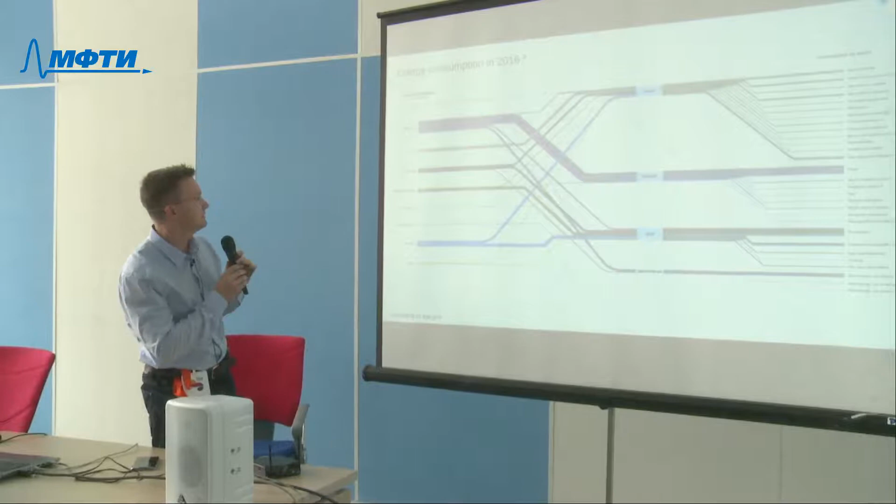Task #1, CHP. CHP is combined heat and power, a natural gas consumption minimization. We can think about this task as about ecology, not only about money. Well, energy consumption is, okay, I can't read this, but I remember. Well, industry is on the top. So industry is a large consumer of energy, total energy in the world.

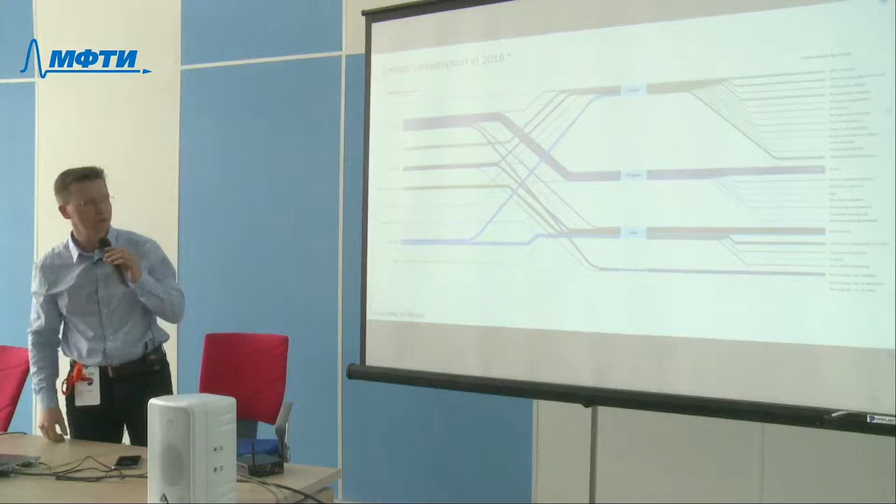And iron and steel is on the top of industry. So iron and steel consumes a huge amount of energy. So we should take this into account and try to minimize this. Well, if we take a closer look at this picture, we will see that industry consumed 29%. And in metallurgy, the biggest part is coal because of the process, blast furnace. And the second place is gas and electricity.

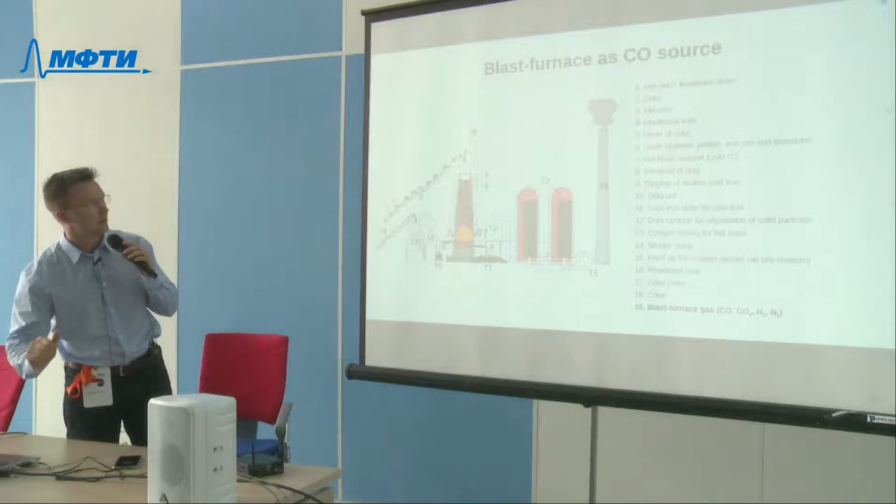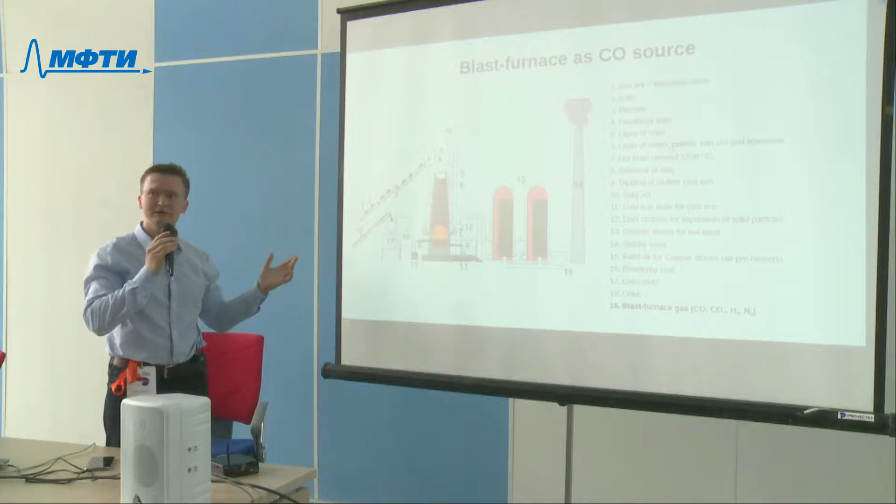So I'm not sure about every, but I think most metallurgical companies have their own CHP inside their facility, because we have a very cheap CO, carbon monoxide source, we have for free due to the metallurgical process. What is a blast furnace? A blast furnace looks like this. We have coke coming from the top and iron ore. Iron ore, руда железная. I will translate some terms because I know that you know English, but terms are very specific for this subject.

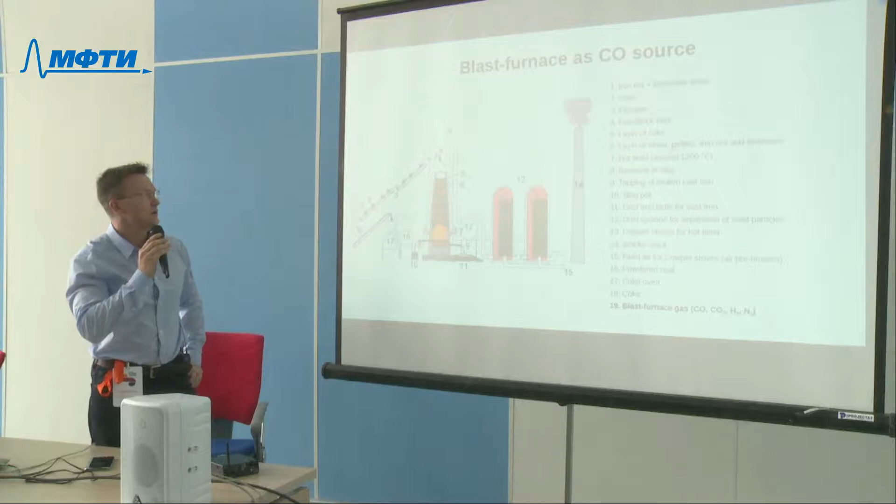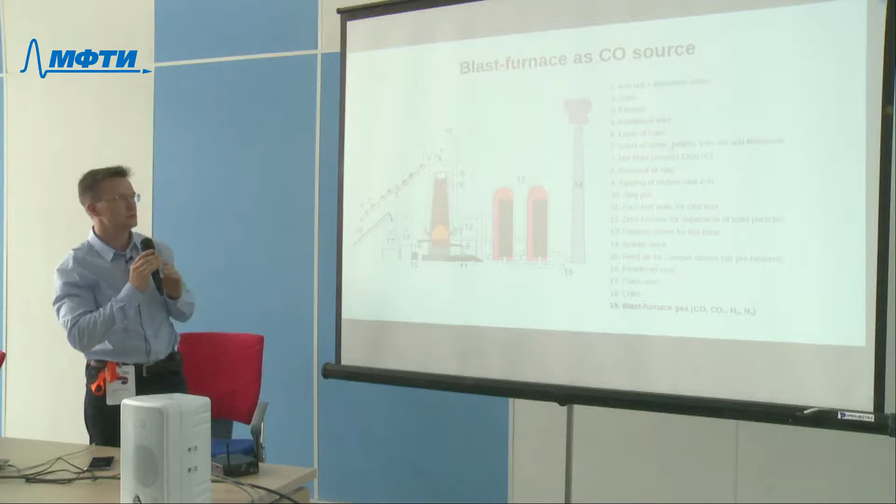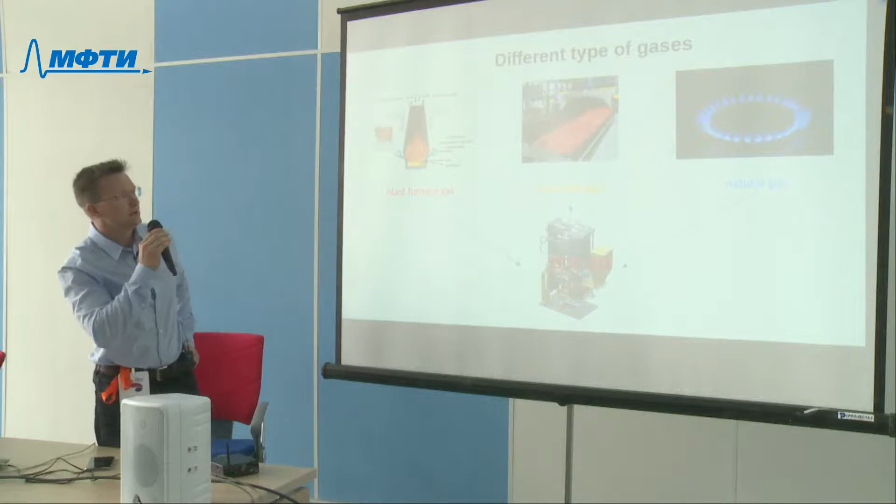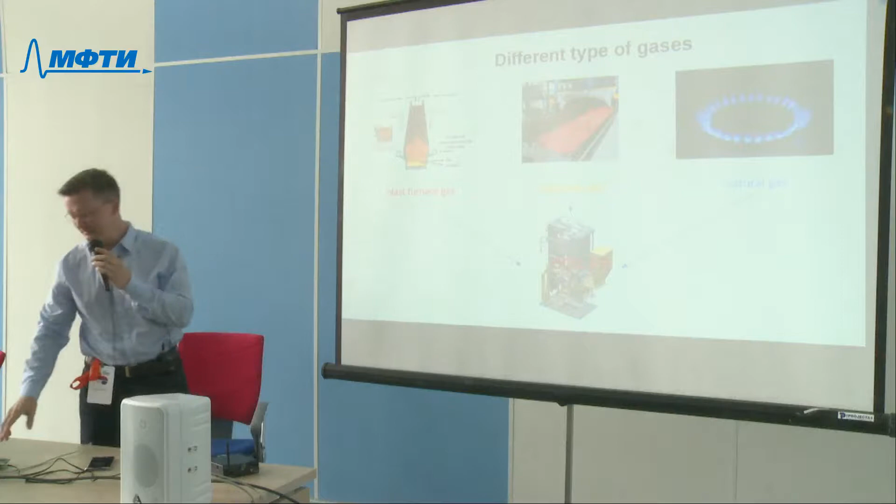Well, so this device is very huge. It's 30 meters of height, so it produces a lot of CO. CO is a source of power if we oxidize it to carbon dioxide. So it is useful to oxidize it and have free energy and generate electrical energy by itself, because to buy electric energy is not cheap. We also have another source of carbon monoxide from coke ovens. It is also a part of the technological process, and we have natural gas from natural sources. And then we put this to the boiler and produce steam and then produce electricity the common way.

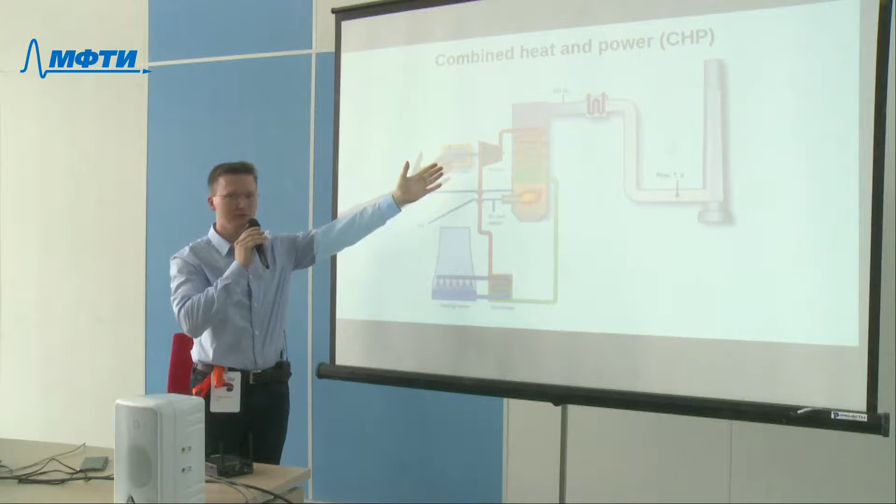Combined heat and power, just to remind, I know that everybody knows how it works. We use something that can be burned, for instance carbon monoxide. Burning, heat the water, produce steam to the turbine to the generator, and here we have electricity. Okay, it looks like this. You see the human is small, and this building is a boiler where we can burn gas. Everything in metallurgy is huge. When you are first time on the plant, it's a very interesting feeling. You see heat changing pipes and so on. Well, it's about metal, it's not about artificial intelligence yet.

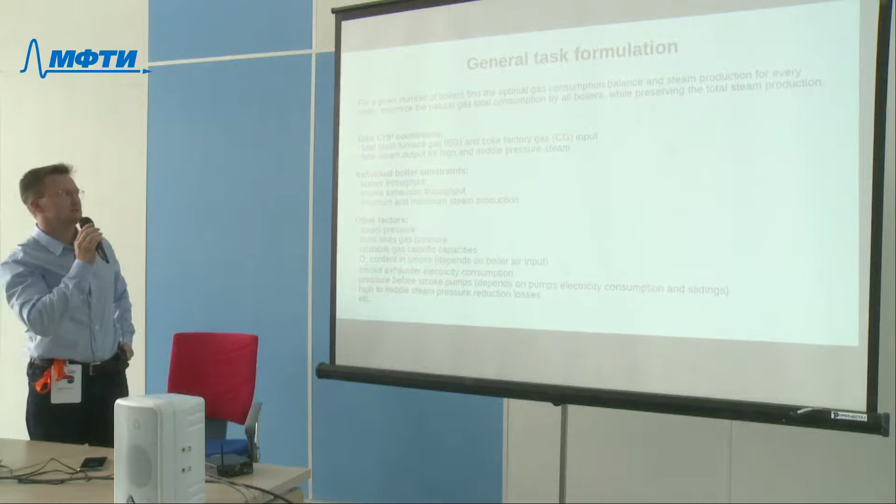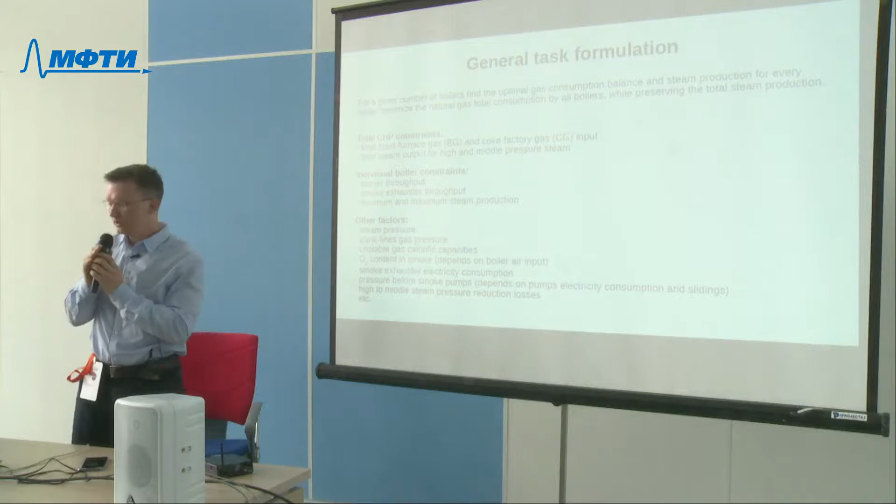Okay, how can we formulate our task? We have a number of boilers, and their properties are not the same. That's why we can change a balance and optimize it, because if they were the same boilers, we could do nothing. So we have different boilers, and we need to understand where we should produce more steam or less steam, and how to balance gas, natural gas.

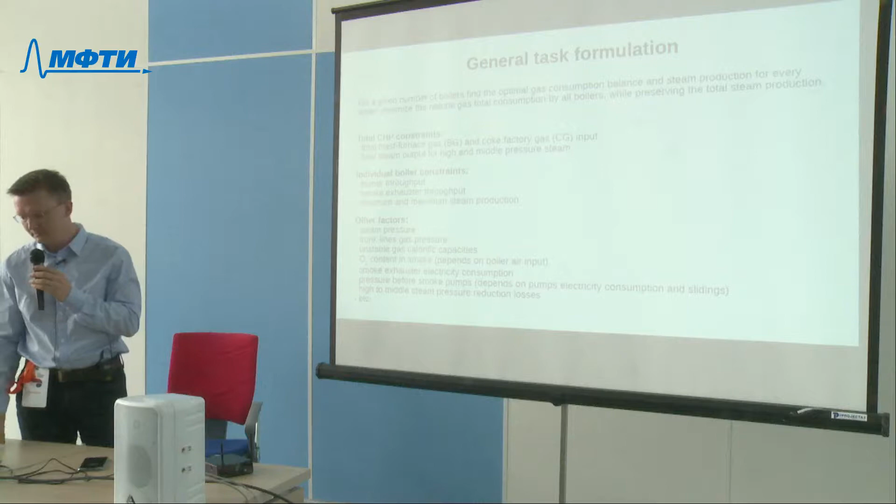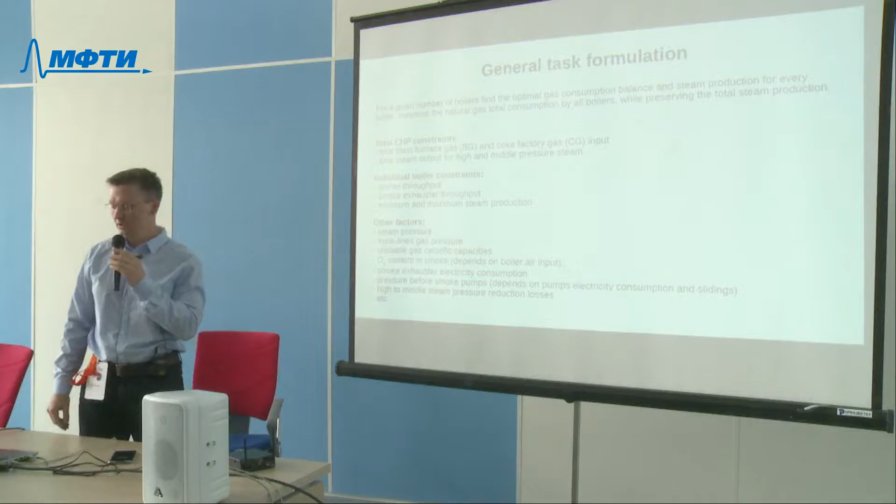We have a number of constraints like blast furnace gas or coke factory gas input. We need steam output to be constant, because the turbine doesn't like it when you change steam output. Individual constraints for every boiler, and other factors like we need steam pressure to be this or that. Unstable gas calorific capacities, because the blast furnace works in a very unstable manner, so your gas properties are unstable too, and so on. We have a lot of constraints.

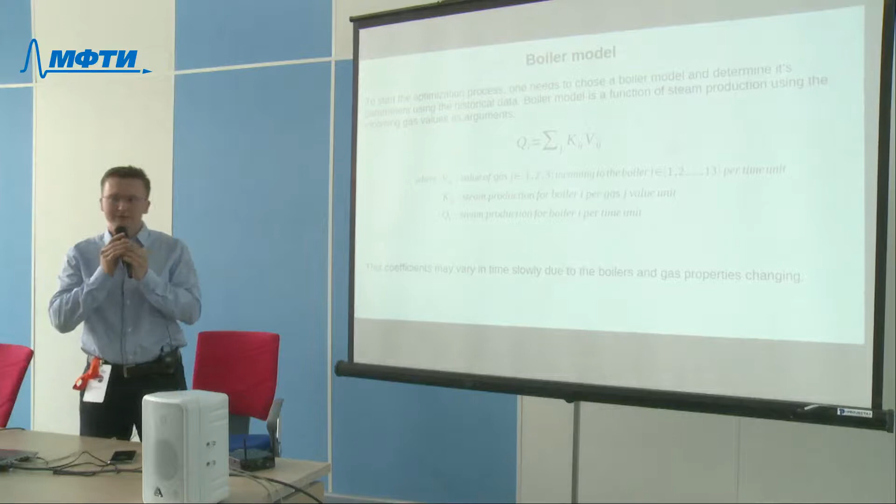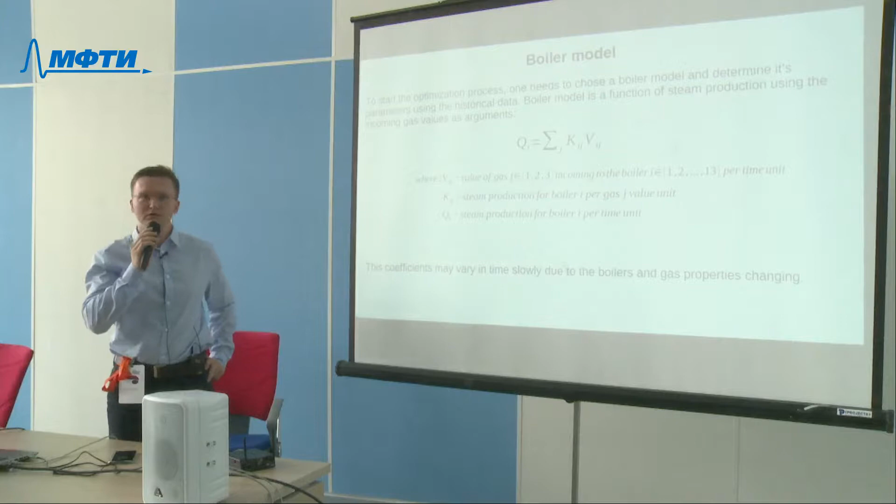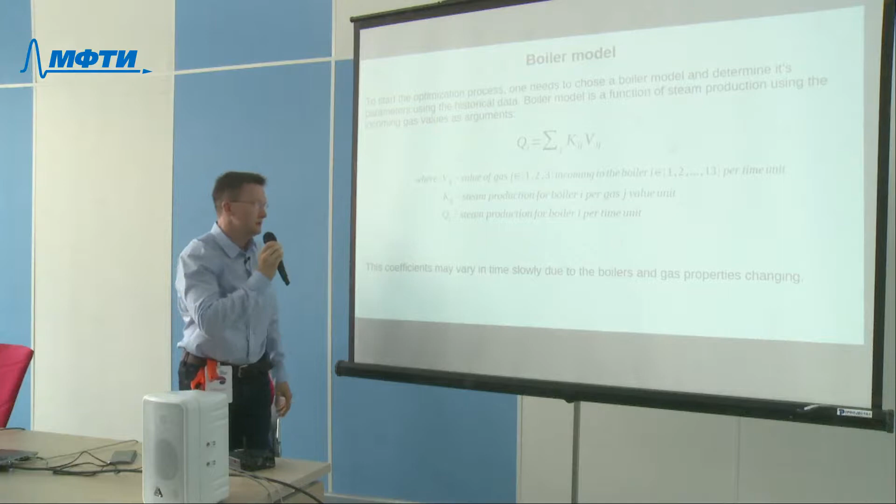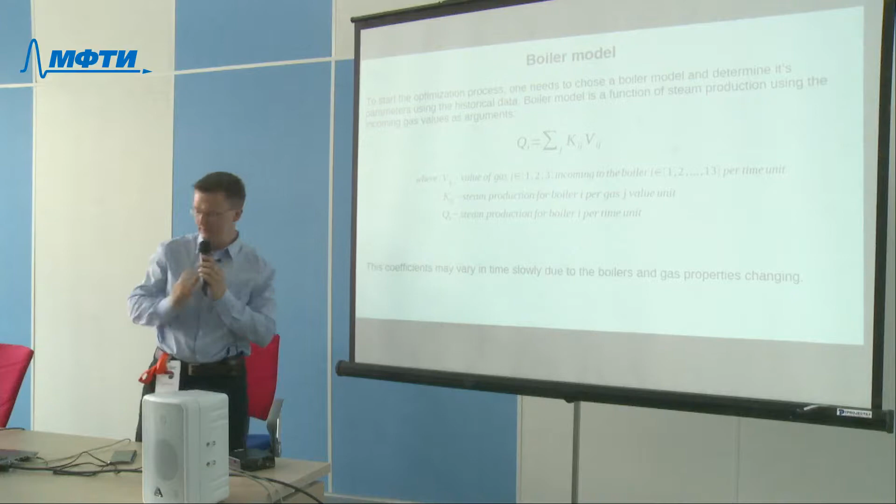Well, we should start from the simplest model. It's a linear model. If it is not enough, then we can use a piecewise linear model, and if that's not enough, we should think what to do. For this time, we have a linear model. What is this model about? This is about steam production as a function of gas consumption. So we have different boilers. We have three types of gas: CO from blast furnace, CO from coke ovens, and also natural gas. We have this. And these coefficients may vary in time, because the process is not too stable.

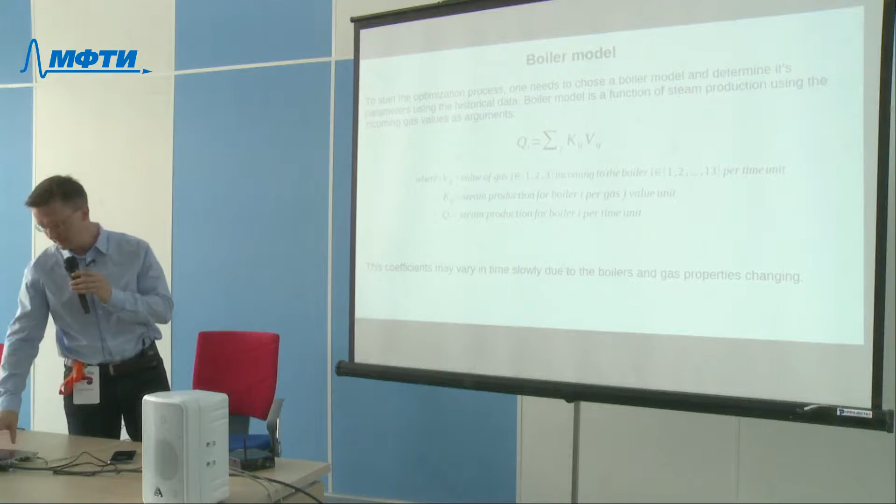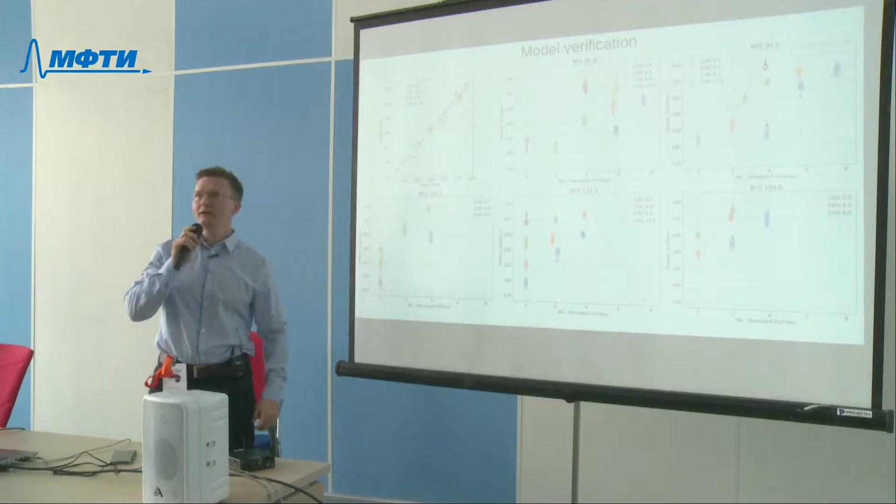Well, we have a linear model, and how will we verify that this model is good for us? Here is the machine learning part of artificial intelligence. We have some historical data, and we need to build a linear model. So it's a regression task. It's simple, but it's useful.

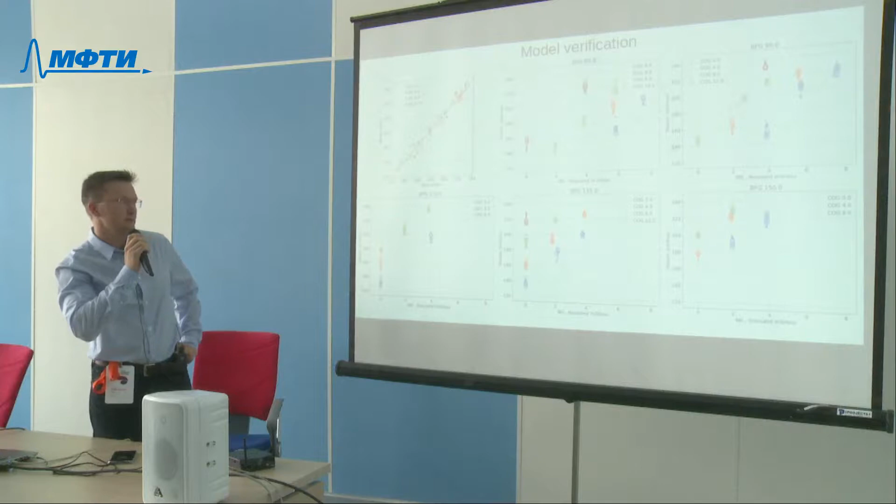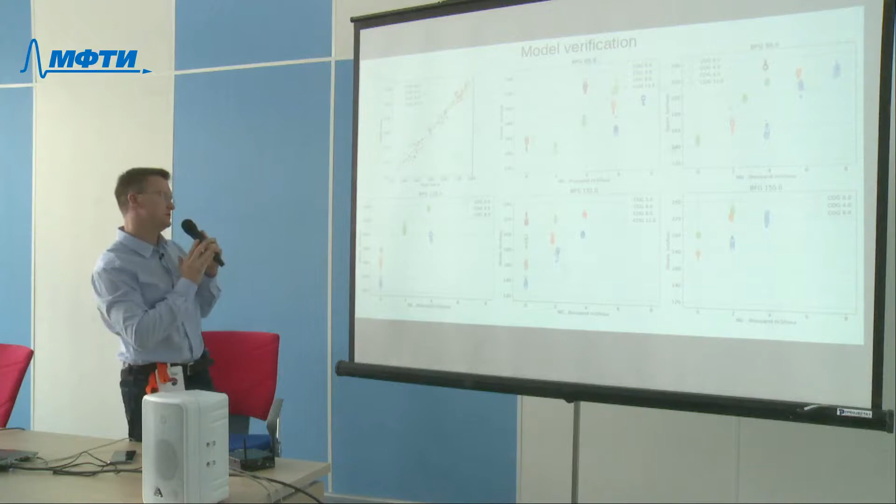How can we check that a linear model is enough? Well, crosses are the real data, and circles are the model data. And we can check from historical data that our model is good enough. It's not perfect, but it is good enough, especially if we remember that our data is very noisy, or that the process is unstable. So we decided that a linear model is enough.

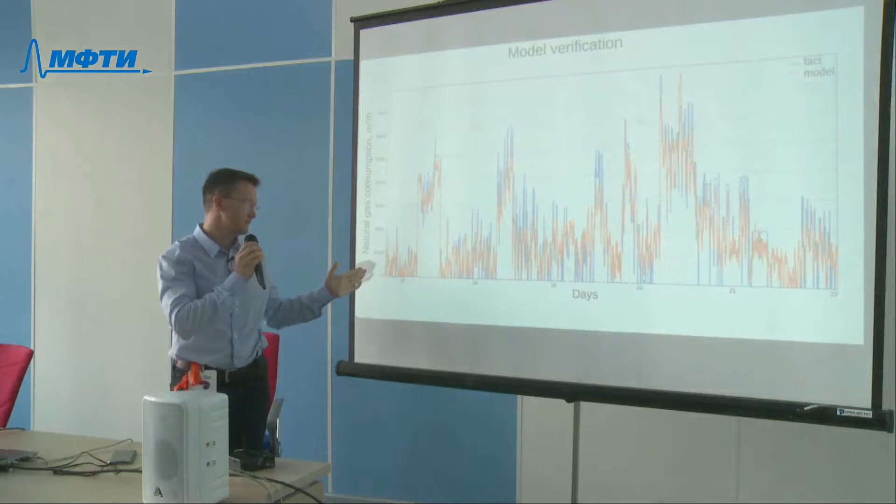Here we have a machine learning part. Also, how can we verify this model? We can compare fact and model. This is natural gas consumption from the historical point of view, and then we model this process using our model, and we see that it's good enough. It's about 5–10% of accuracy, so it's good. Well, so let's start to use this model.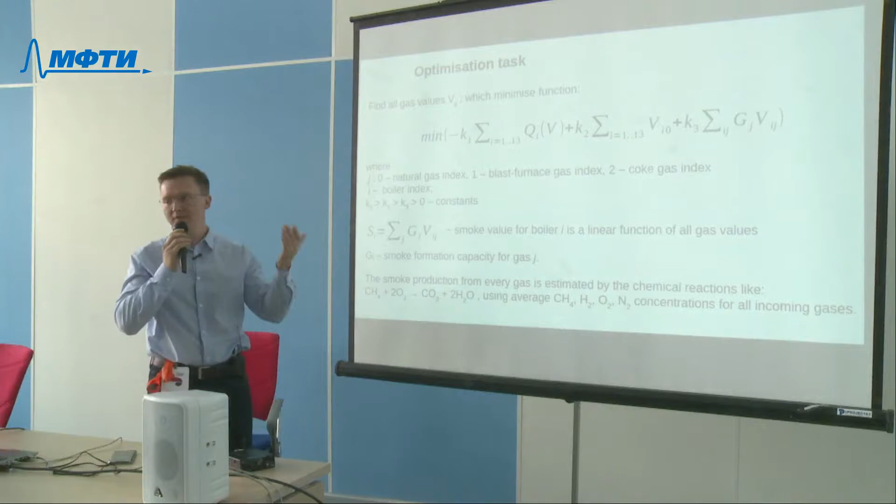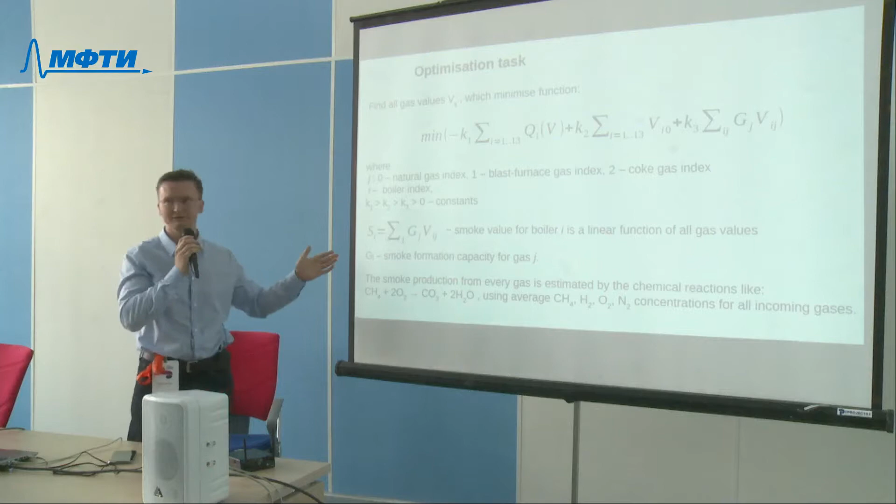And we need to use some chemistry to write chemical reactions to understand the volume of smoke, because you cannot produce too much smoke; you have constraints due to the chimney, the smoke pipe. Well, it's just a classical optimization task with a linear function and linear constraints. It is well known that it can be solved very fast if it is not huge in terms of variables and constraints. This task is not huge. We can solve this on a personal computer.

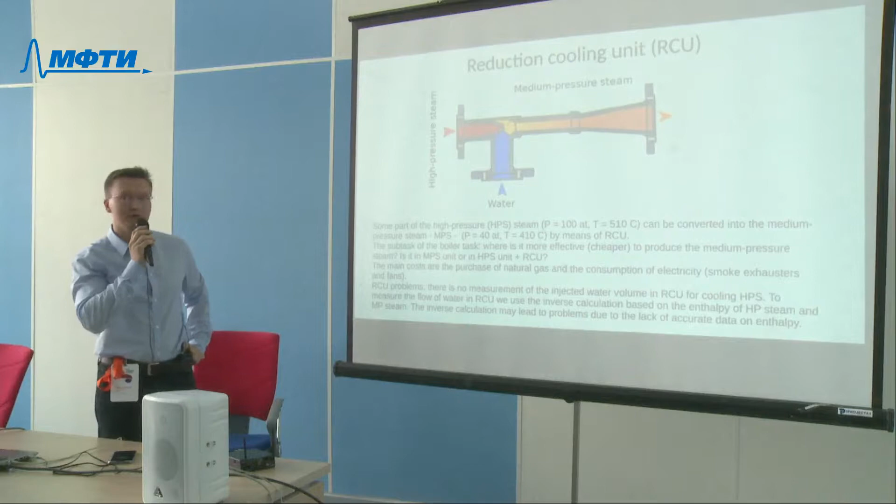If it were a contest, we should stop here. But life is hard, life is more complicated, and we have more detail. So we have some special steps in this facility. We have a reduction cooling unit, for instance. Why am I talking about this? Just to remind that sport is not life, because, I repeat, if it were a competition, we should stop here. We could give you this task, you would solve it, and everybody is glad. Well, it's just a proof of concept in real life. Then you should continue to this step.

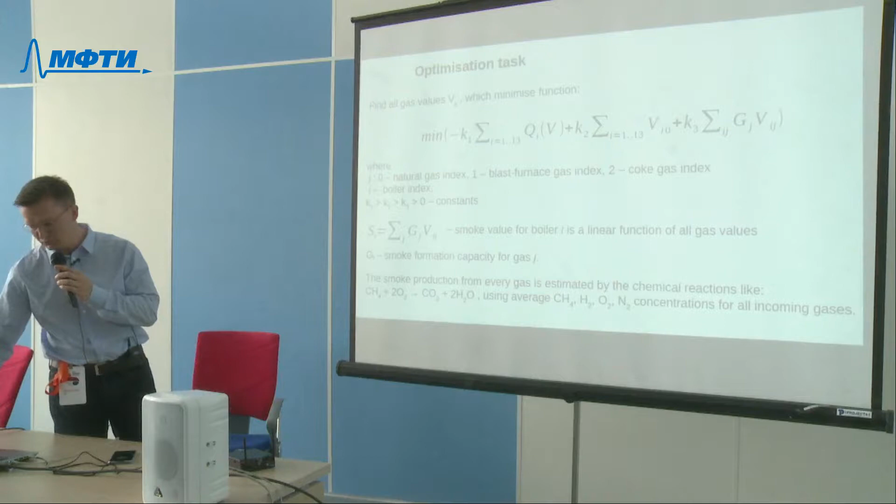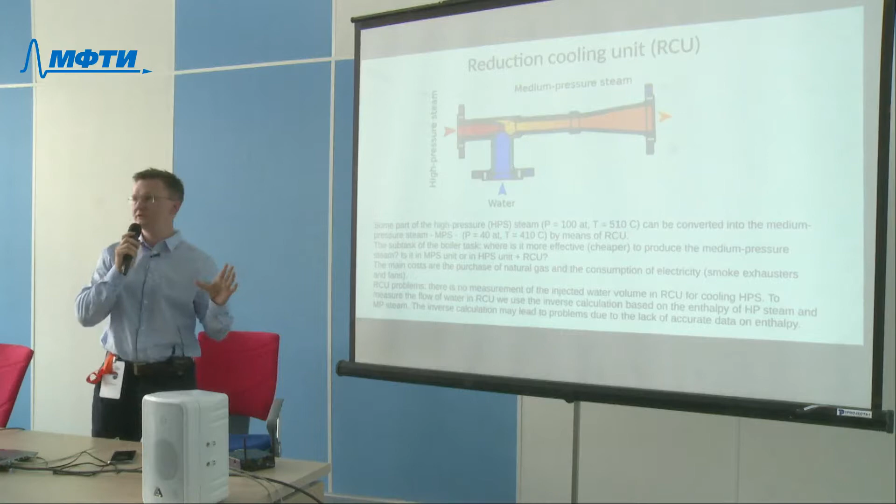Hard life. We have a reduction cooling unit which can convert high pressure steam into medium pressure steam. Then you need to choose where you want to produce your steam if you want medium pressure steam: on medium pressure steam boilers, or on high pressure steam boilers and then convert it to medium pressure steam. Well, we have a lot of difficulties inside this part. I will not read all this because it's boring.

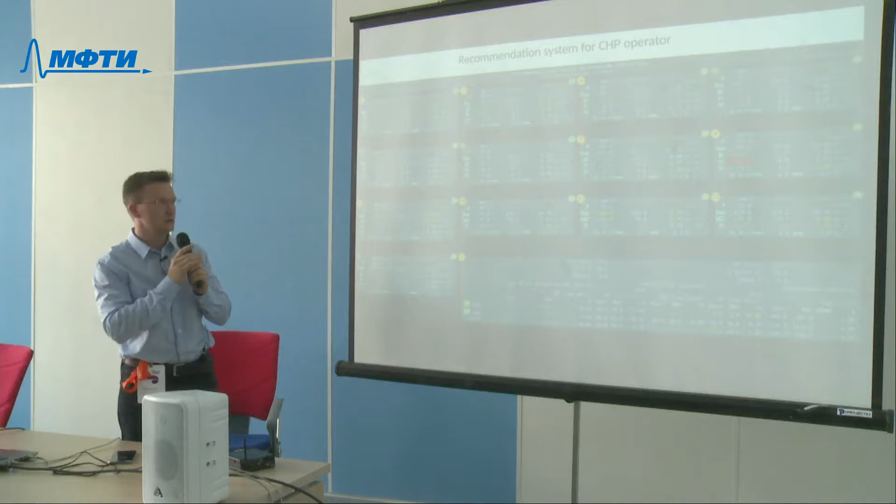Well, the system, the recommendation system, looks like this. If you're an operator of all these boilers, you have this interface which recommends what to do. You don't need to think. You don't need to learn too much. You just start this application, and it will collect all the data it needs, do some calculations from the optimization point of view, and recommend what to do, how to create the right balance. That's all. The operator can sleep and sometimes wake up, take a look and check. You can see.

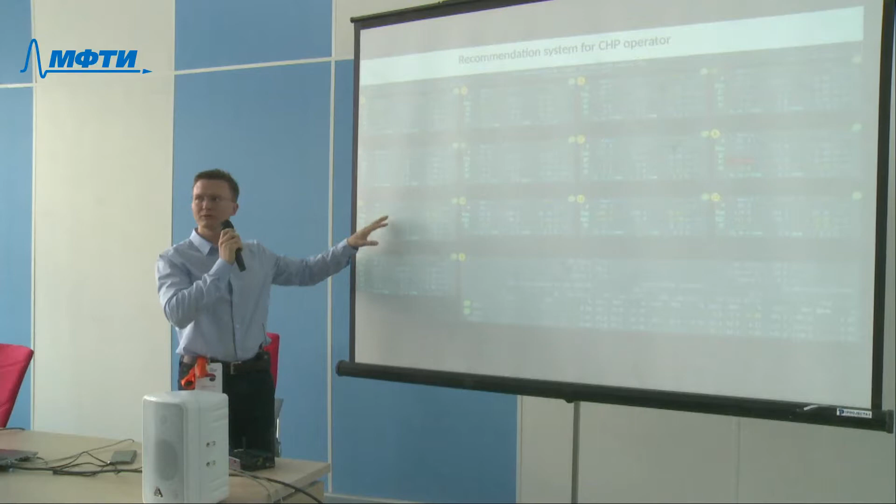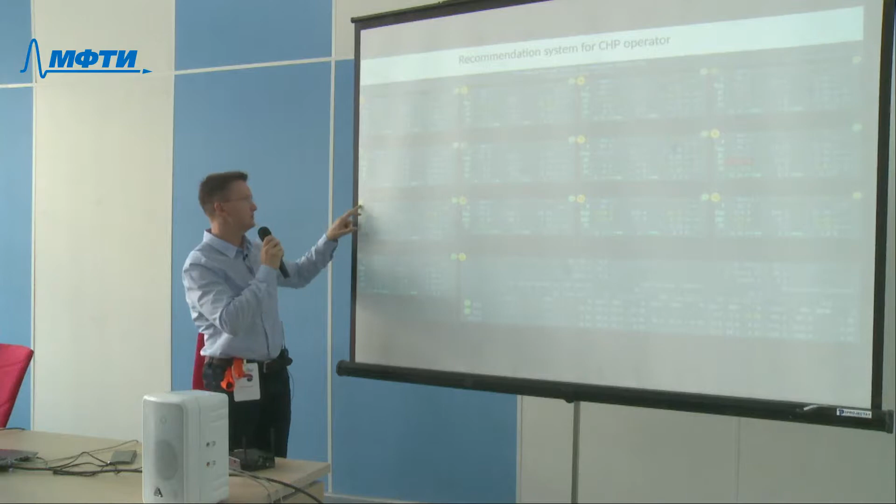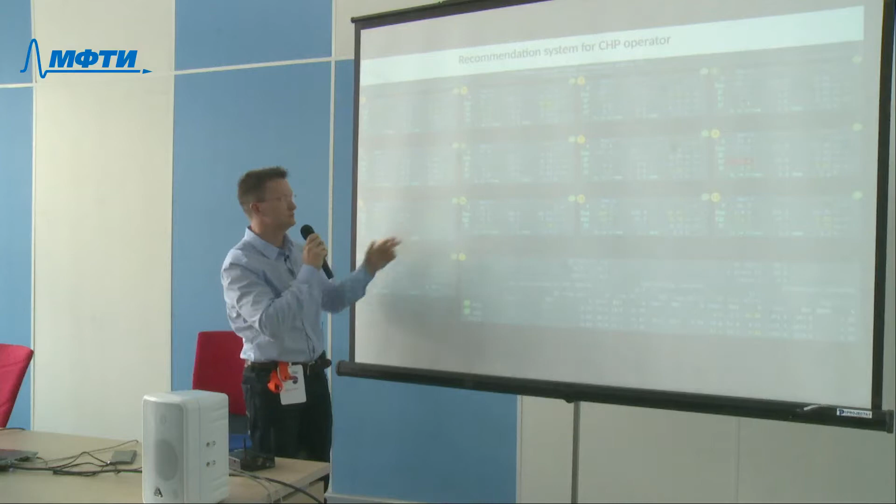We cannot show all values, sorry. For instance, here you can see that blast furnace gas is not optimal at this moment. You see yellow. Yellow means not too optimal. Green means optimal. So we have 13 boilers. Some of them are completely optimal, and some of them are not completely optimal. Also, red color is possible; it's completely unoptimal. And we see that deviations are just 1% or 8%. So it's very simple. Just add some gas or remove some gas.

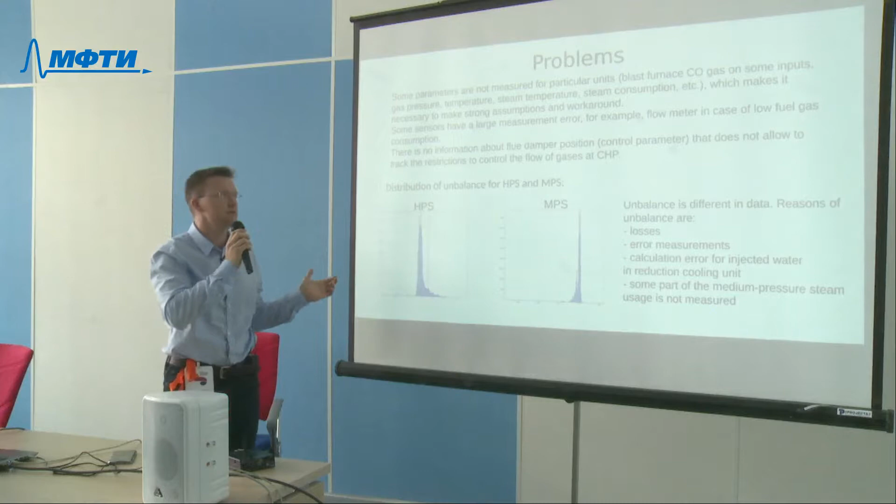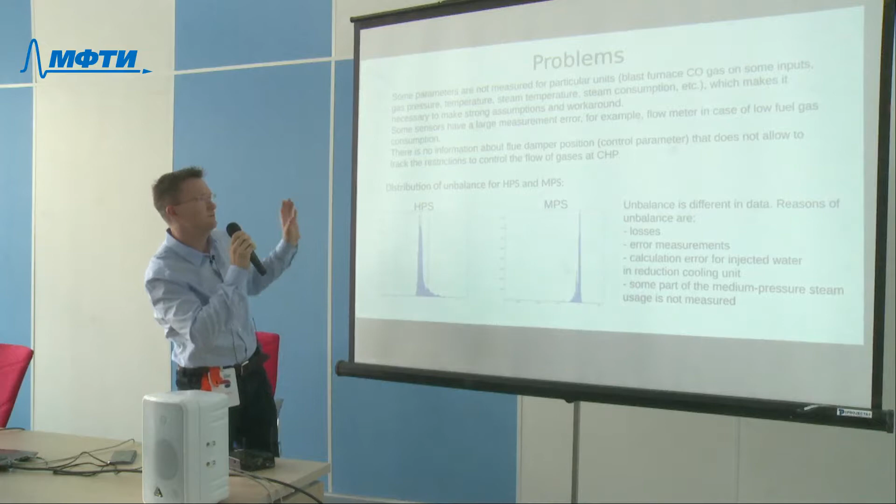Here we are. Problems: as usual in real life, you do not have ideal data. You need to do something with errors. Some parameters are not measured at all, or not measured for particular units. For instance, we don't know the caloricity of gas, because its caloricity is not stable either. So we need some approach, take average values and so on. No information about some special device positions, some errors. We do not know fuel gas consumption and so on. So, well, it's real life. It's not just a sport, not a contest.

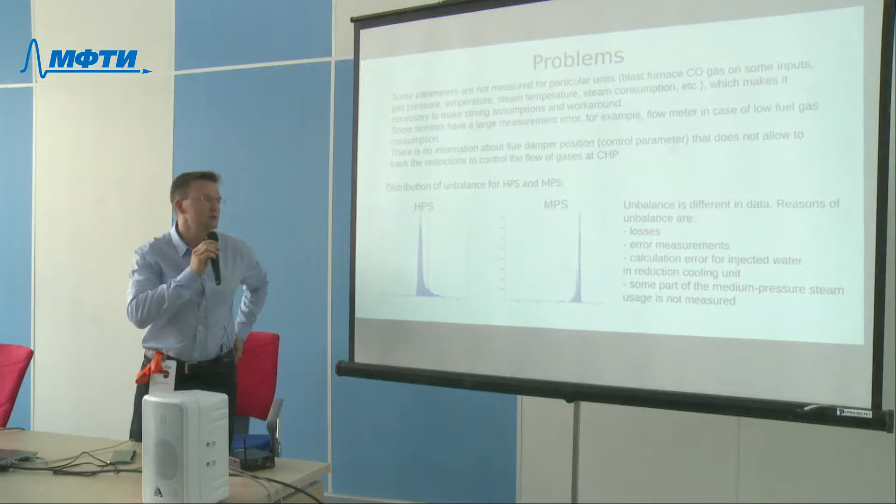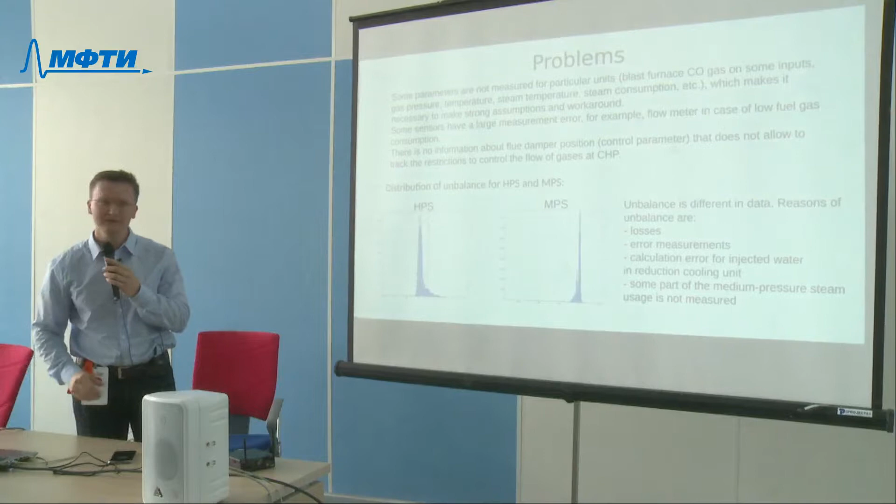So, if it were a contest, the task could be solved, I think, in 1 week. In real life, we spent more than a year on this. So it is good to have intelligence to solve these problems, not artificial, natural intelligence.

Okay, task 2, rolling process optimization. You know the subject because our contest is about rolling. What is rolling? Rolling is this process, when you have a hot metal and then you roll it and you have a thinner metal. That's all. You're just producing thinner metal from thick metal using rollers.

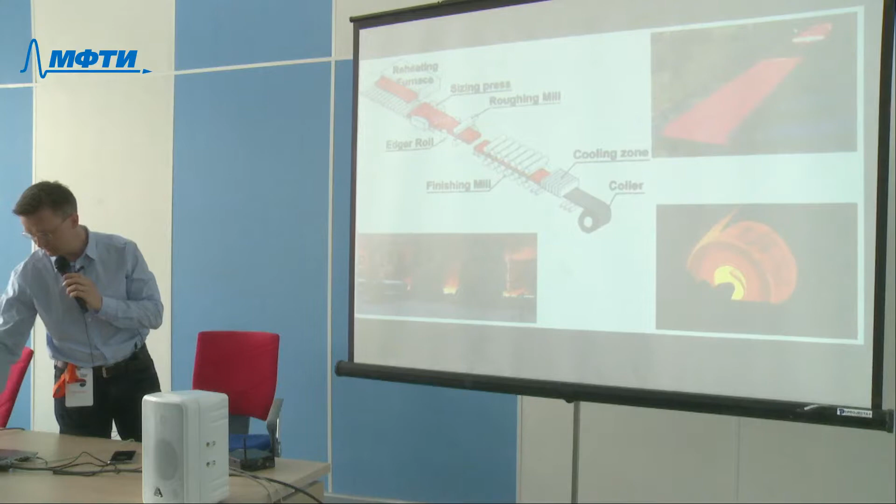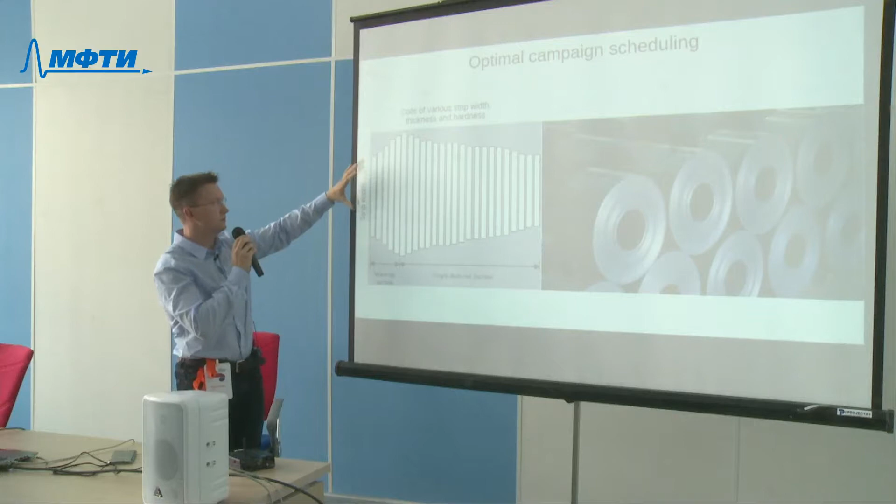Rollers are not very stable too. They should be replaced every 3 hours. So we have a campaign for approximately 3 hours, and the campaign looks like this. This is a strip width, and these are strips from which you create the coils. Coils look like this. So you have to start from narrow, then go further, and have this profile for the campaign.

How can you create this campaign? This is a very difficult mathematical task, frankly speaking. Now it is performed by a human based on his natural intelligence. We're hoping that we can use artificial intelligence in this process too. That's why we gave this task to you.

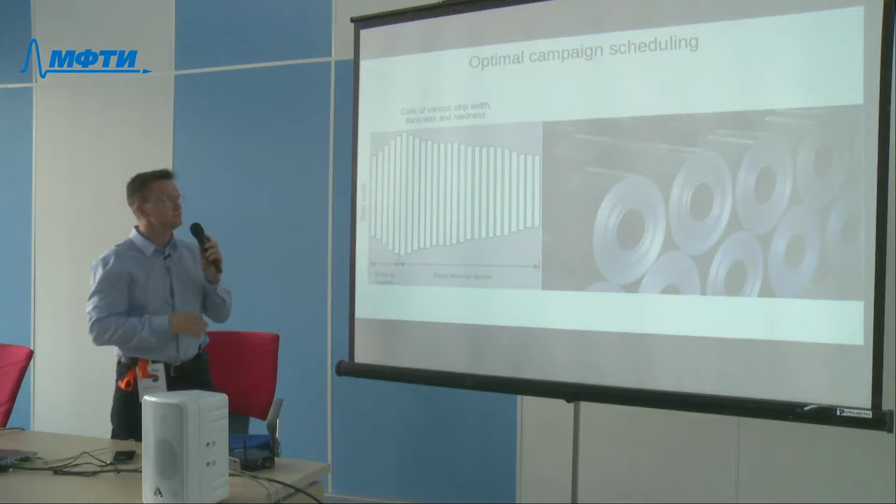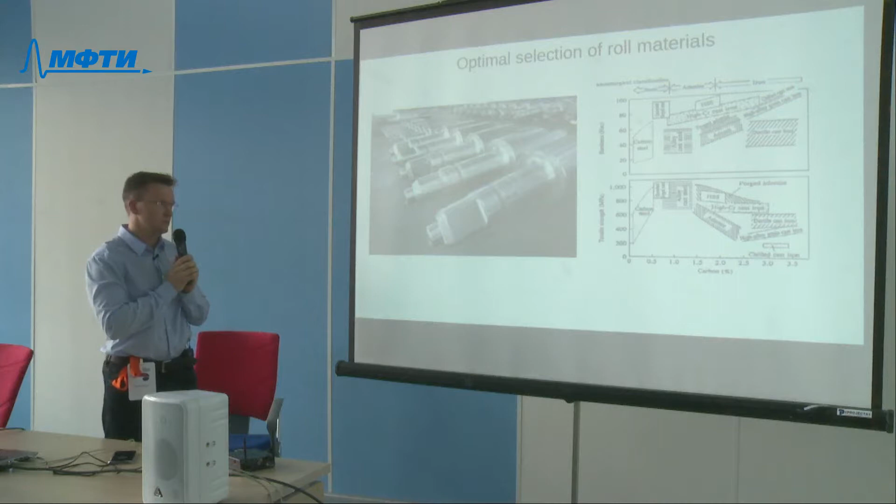We see that hardness can be different, tensile strength can be different, and so on. And price can be different, sure. So it's not always optimal to use very expensive rolls. Maybe sometimes for some kinds of materials you want to roll, it's better to use cheaper rolls. So it's an optimization task again.

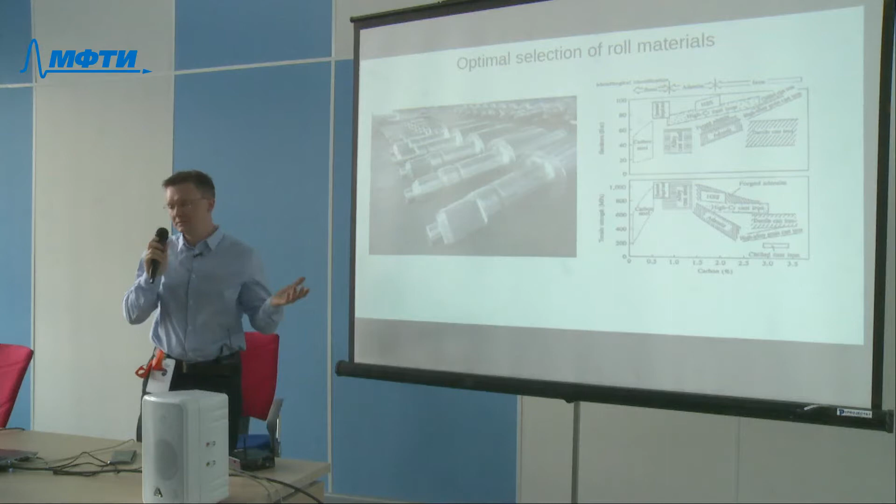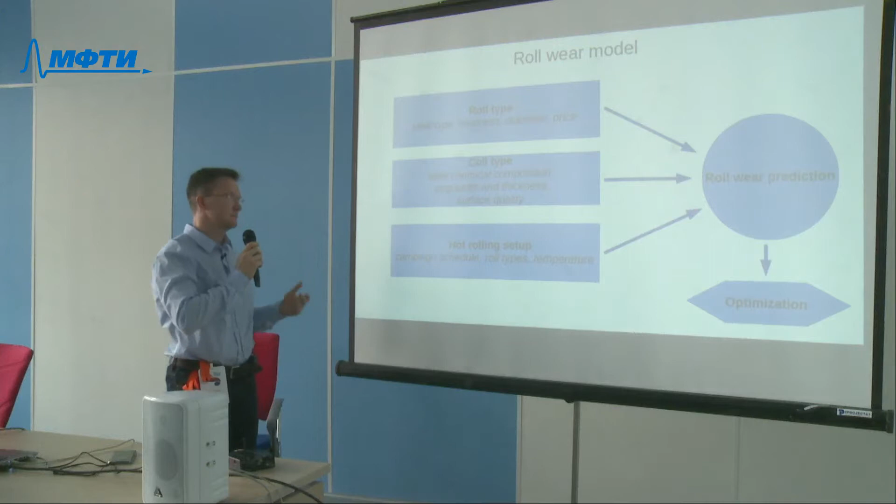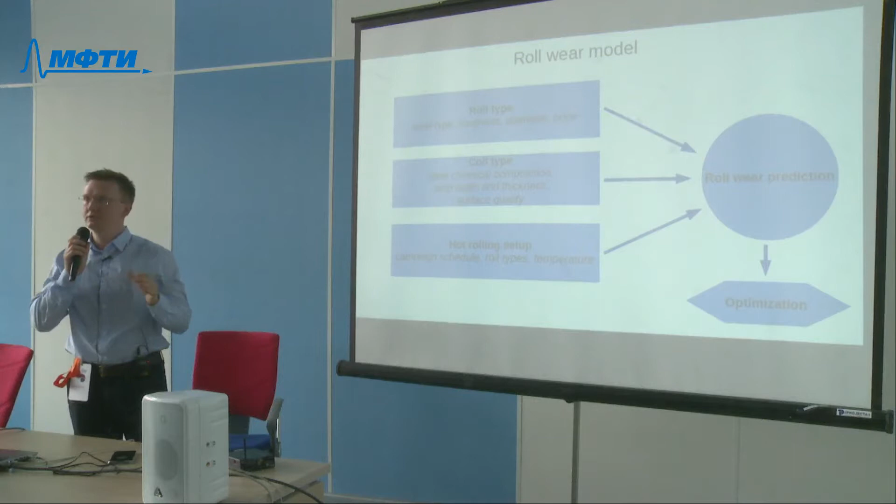What should our model of roll consider? Well, we should take into account roll type, its steel type, its hardness, its diameter and price. Coil type: chemical composition, width and thickness, surface quality. Because when a roll is not new, you have some lack of quality on the surface, and some products should be done with a very perfect surface. Some maybe not. And also you have a campaign schedule, roll types and temperature.

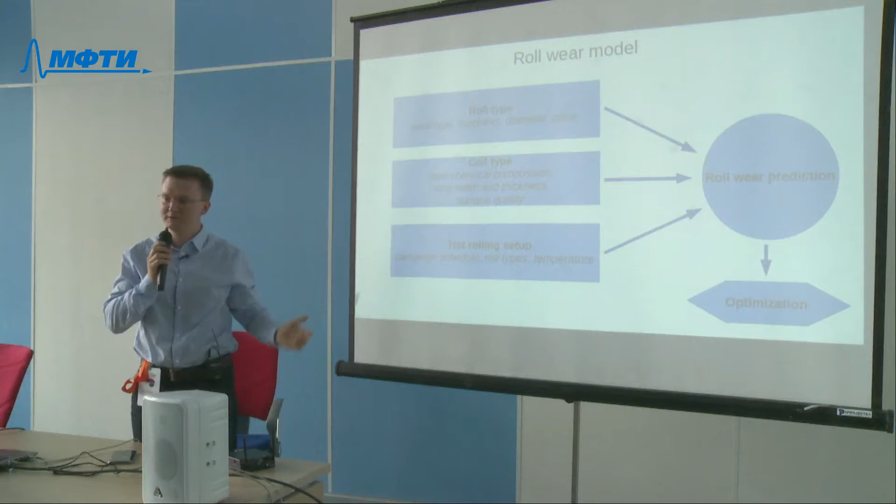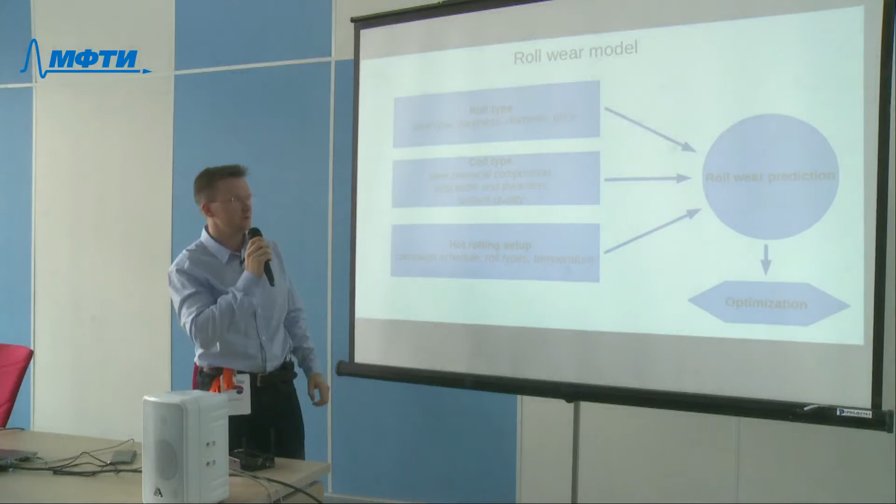Then you can build a roll wear prediction. Prediction is a part of the typical artificial intelligence field too. Good prediction is very important. And then if you have this prediction, you can create an optimization task and optimize the work of the hot or cold mill. Cold mill is стан, прокатный стан.

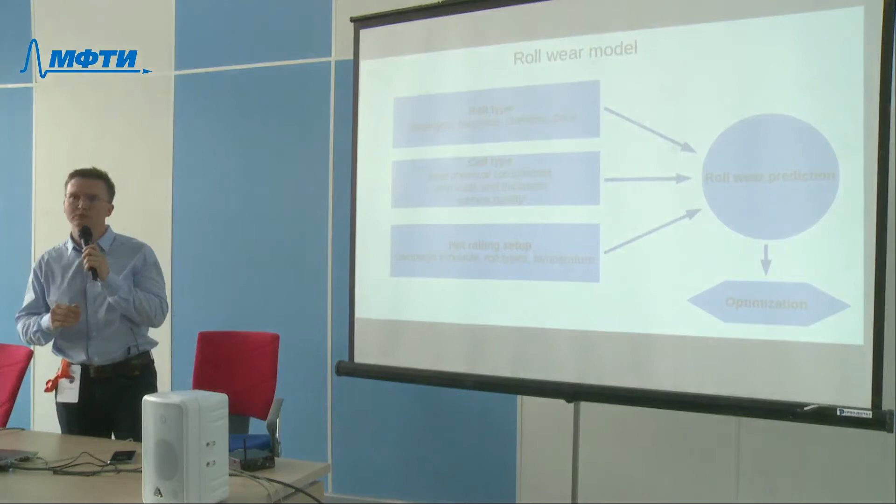Well, this is about our competition. I think this information will be useful for those who take part in it. We cannot tell you too much because we're afraid to make the competition unfair.

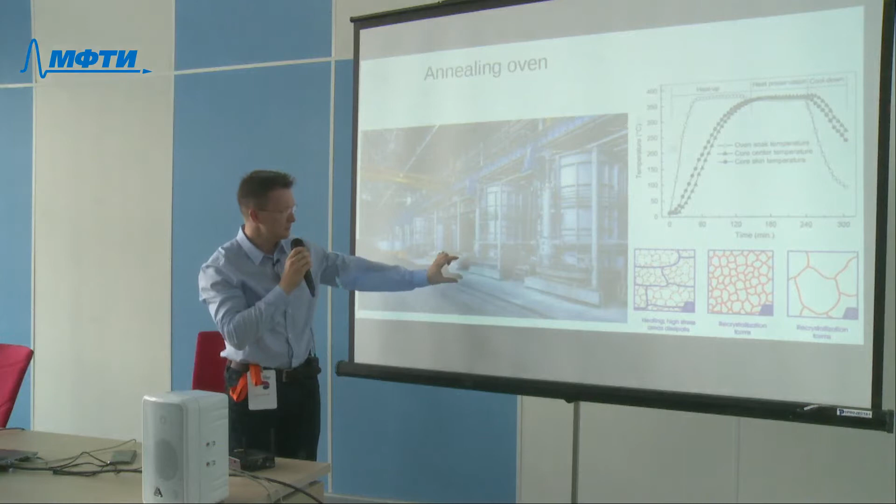Well, this is the oven. This is huge too, as everything in metallurgy. A human looks like this, so it's about 10 meters in height. You put coils inside this oven, use this heating profile, and then you have a change in its inner structure. You know that metal inside coils contains grains.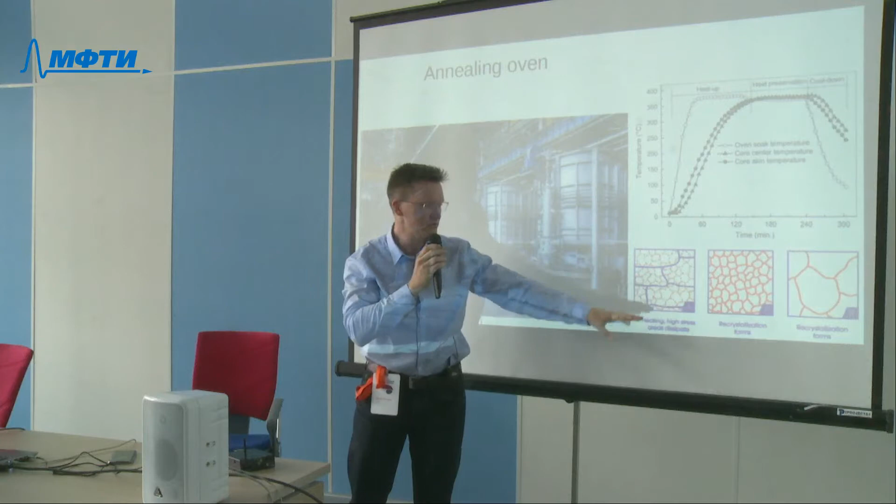So when you're heating or cooling, you change its grain structure. Grain structure means properties. Metal could be soft, could be hard. Even if you have the same chemical properties, you can have different grain properties, and you will have different physical properties. So annealing is very, very important. So the question is, what is the right annealing process? And what is machine learning's role here? Why do I tell you about this?

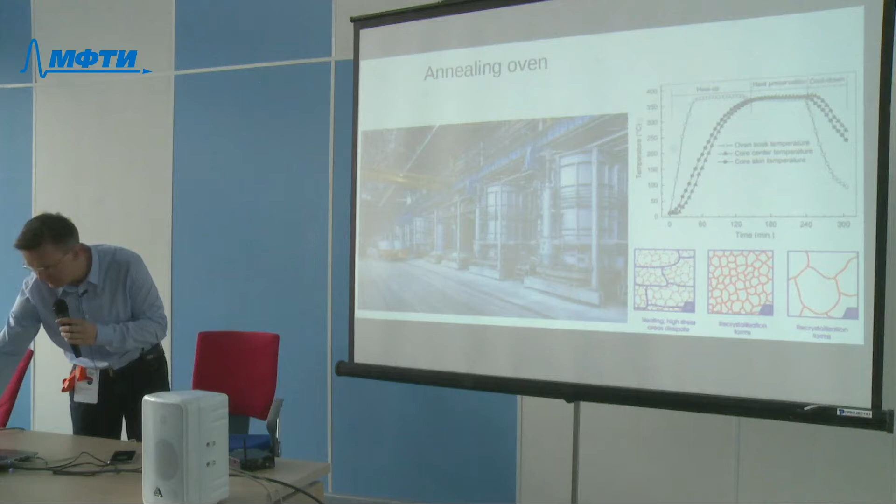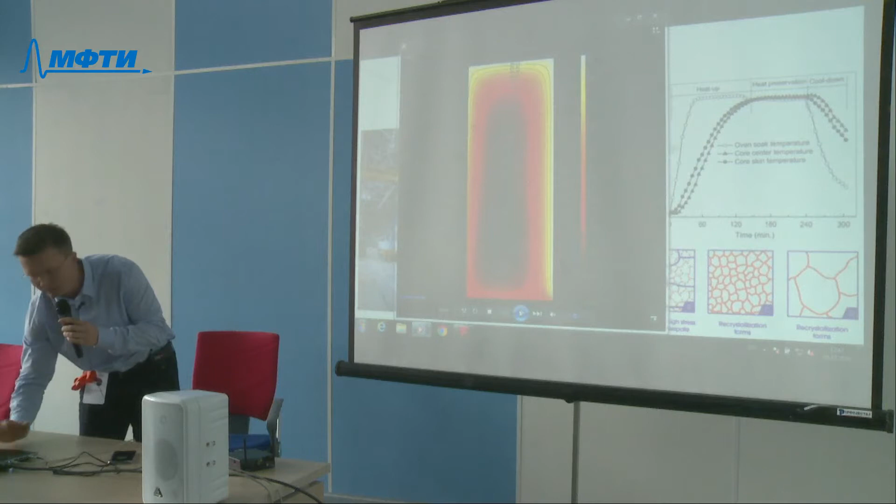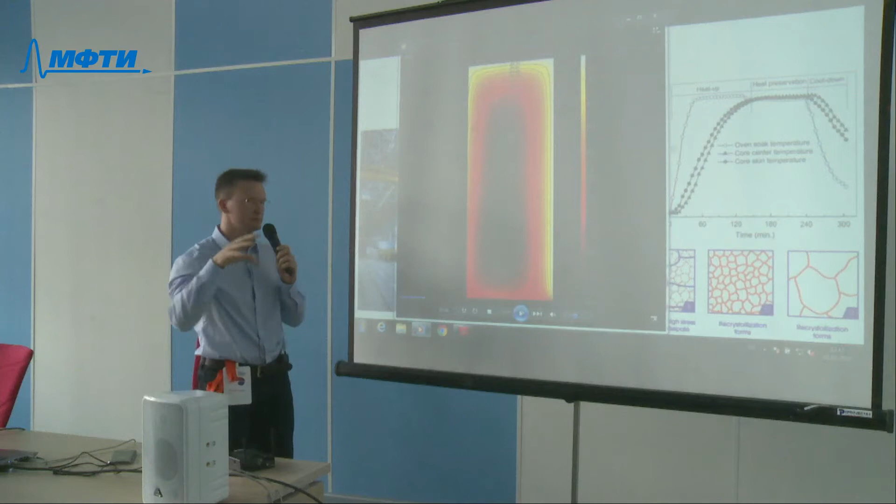Let me show how the temperature profile inside the coil looks. I have a special video for you. What is it? It is a coil. If we cut it, you can imagine that this is the axis of this coil. It's a cylinder with a hole inside, so it has radial symmetry in most cases. And how can we heat this coil? We heat it by infrared radiation.

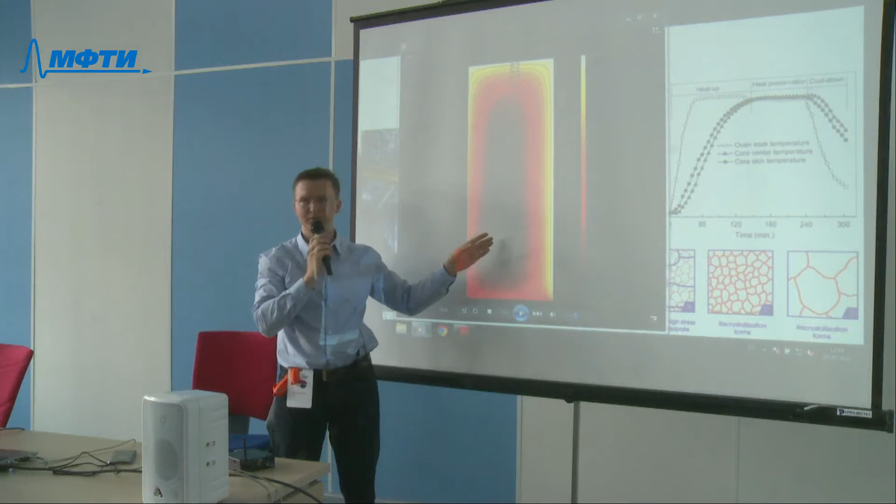So the external part heats faster, inner parts heat slower. We have a hole inside, so a small part of radiation comes there, so we have a heating profile. It's hotter in these parts, and inside the coil it's colder. And you know that grain structure depends on the temperature profile, and we see the temperature profile is definitely not the same for every point. So we need to optimize this profile to have stability in its properties.

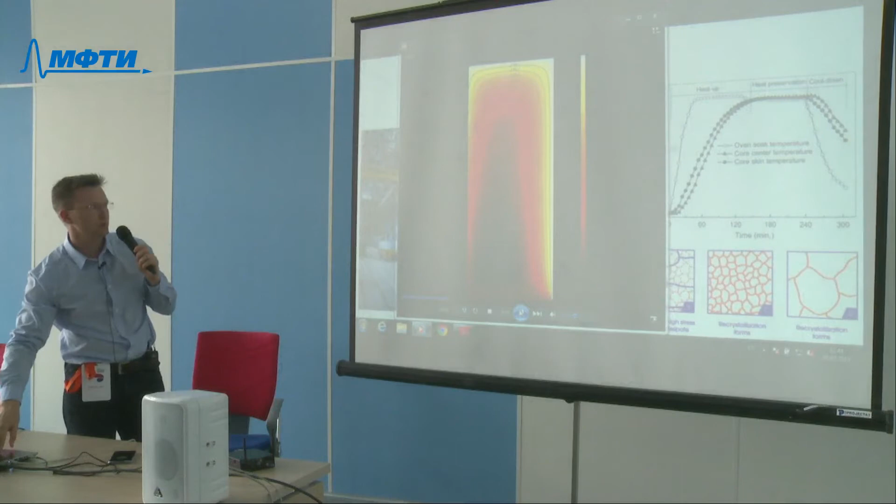Well, it looks like this, it's just a toy example. Why is it important?

Why is it difficult? Because it is not just a piece of metal. It is a coil. It consists of about 1,000 layers. Each layer is not flat. It is thinner on the edge and thick at the center. So you have a larger thermal conductivity in the center because pressure is higher, and lower conductivity on the

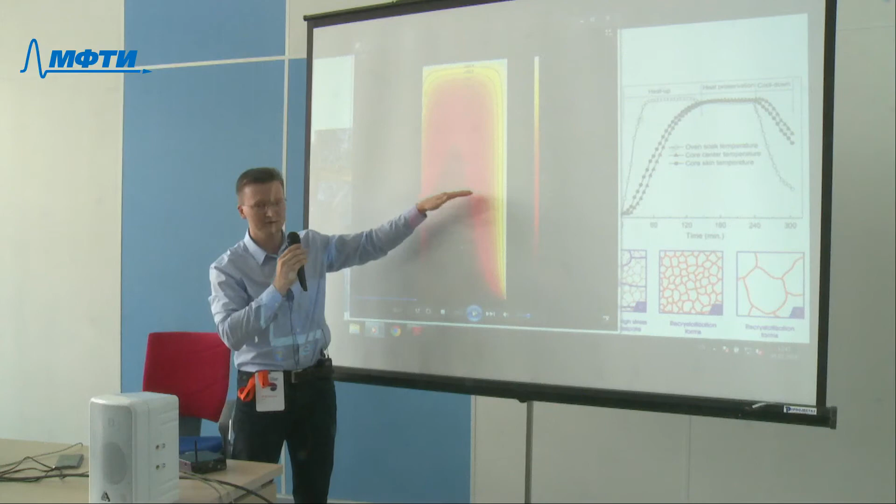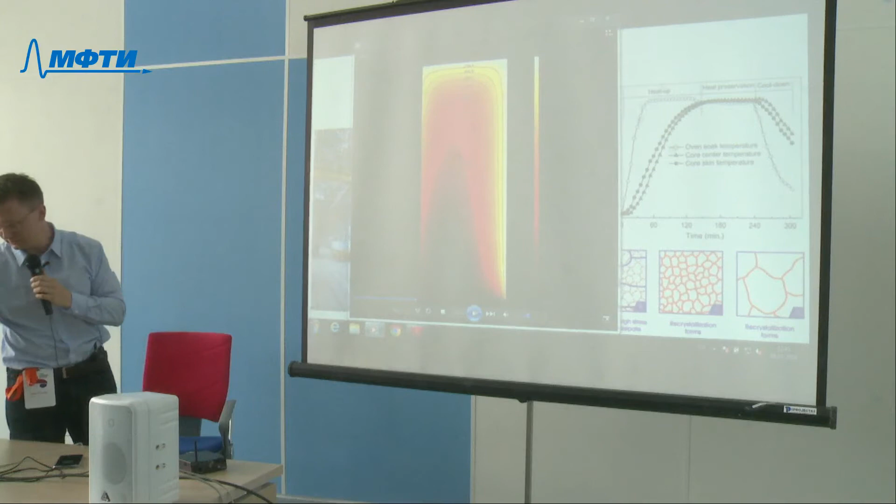edge. Also, it's a layered structure, so you have a thermal anisotropy. You have a high thermal conductivity in this direction and lower conductivity in this direction. So it's a meta structure. It's not just a piece of metal. Also some chemical reactions inside and so on. So it is very difficult to calculate properly.

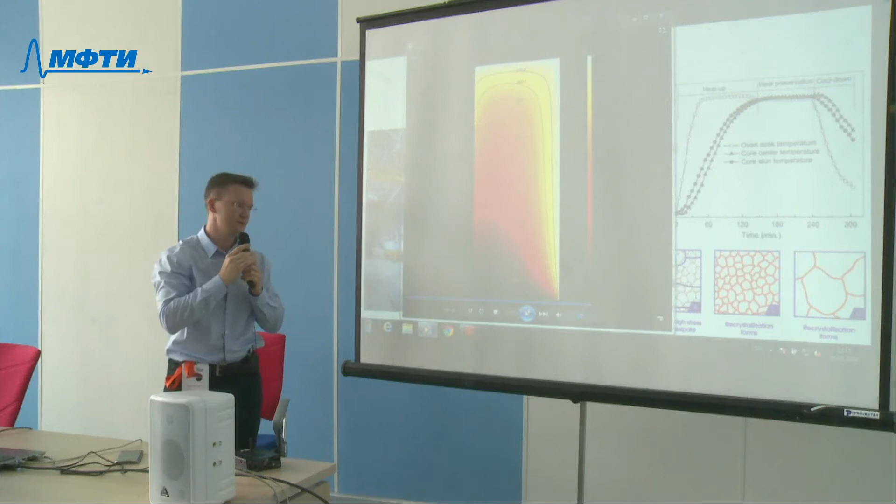So I can tell you that we collaborate with institutes who helped us to calculate this in the right way. Well, you can see that we have another optimization task. How to create a right thermal profile to do things well. What is good? Okay, let's imagine that good is a uniform heat profile in every point, just for instance.

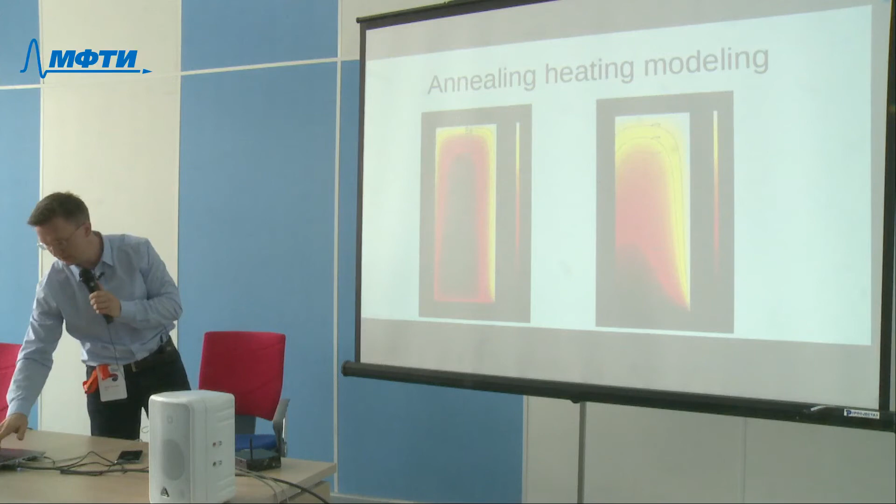Where is artificial intelligence? It's just physics. I'm sure you know about this picture of heating. You saw that. Surrogate model. A surrogate model is a part of the artificial intelligence world. What is a surrogate model? A surrogate model, we can call it smart interpolation.

You know about the physical properties of your structure, and then you add some knowledge into this model, and it will create a good interpolation from a physical point of view based on a few points. So you need to create a set of points. Each point takes hours or maybe days to calculate because the task is very complicated. Now you know why. Because you need to take into account all this physical stuff.

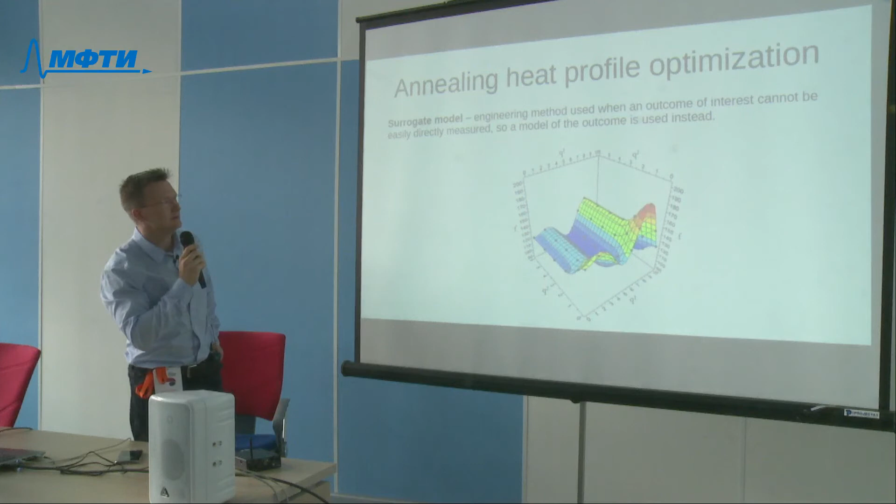And you cannot create millions of points, but, for instance, you need to find the minimum of this function. Then you need to create some special surrogate model or proxy model that can help you to optimize your process. This is exactly what artificial intelligence is. So it's difficult, but you can try. We are trying to create these models too, so you can help us with this problem.

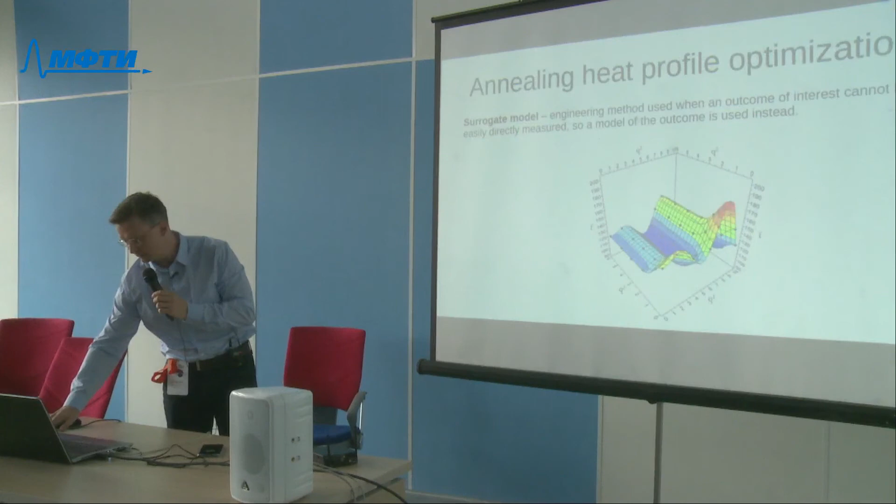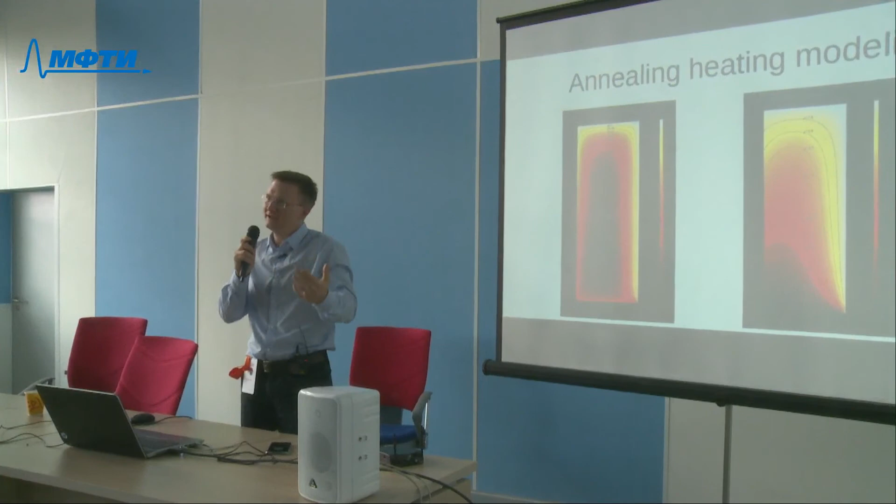As for proxy modeling, yes, it's very famous. And modeling of annealing is an old problem, yeah. But you know that industry does not like to share its results. That's why maybe we should reinvent the bicycle. I don't know. But we should. Sure, we're trying to do a paper search, but there's not much information about this. One more question there.

What kind of methods do you use to build this proxy model? It's partial differential equations, like thermal conductivity equations, tensile equations, because it's a metal structure. It's layered. Every layer has its own tensile. If this part is hotter, then your perimeter is growing, and then tensile is reducing, and so on. It's a very complicated structure.

So we have thermal, dynamic, tensile equations, a bit of chemistry inside because we have hydrogen here which passes through this structure, and so on. A lot of approaches. You were saying about the ground truth model, but yes, okay, I see. We're just at the beginning. It's a very complicated subject. Okay. Any other questions? I invite you to help us.